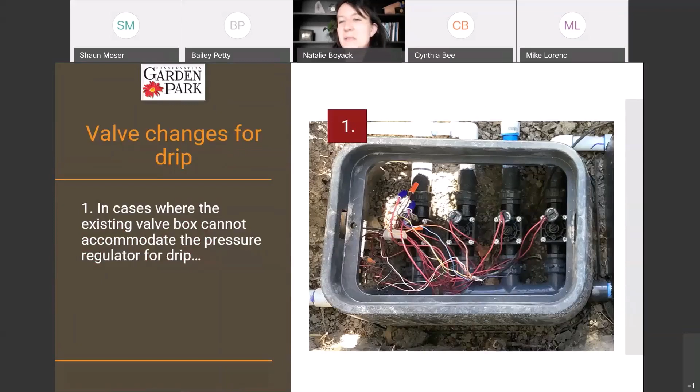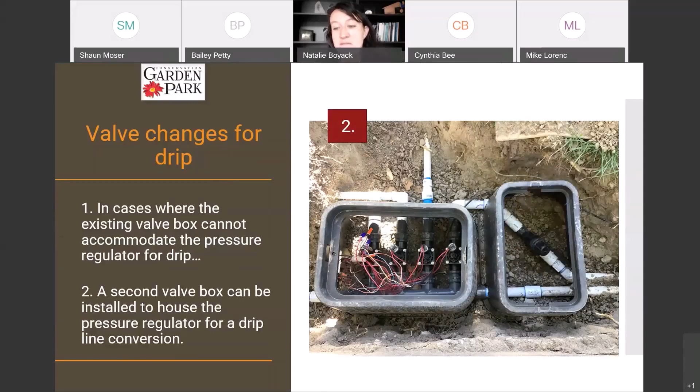So if you are wanting to put the pressure reducer and filter at the valve, but there's not room in your valve box, then you can get a little bit creative and add another box either by the valve or closer to where the drip is going to come out of the line, and add the pressure reducer and filter there. I would highly, highly, highly recommend putting it in a box though, and not just burying it in the ground, so that you can get to that filter to clean it out if needed.

All right, so if you are going to use a retrofit kit, they're pretty easy to use. Depending on how big your zone is and how many of those you would need, it may be cheaper to do the one at the valve. It would be something to at least look at pricing wise.

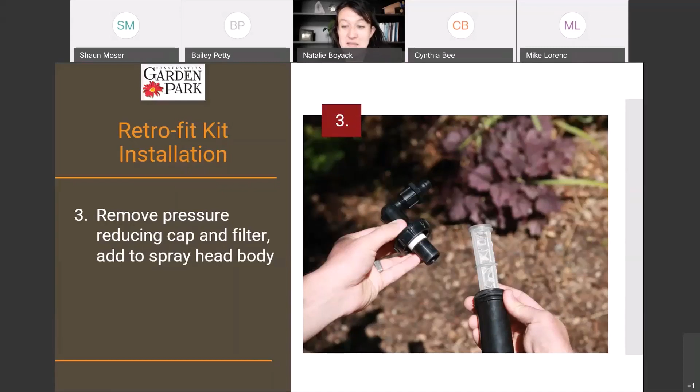And then with the retrofit kit, it comes as a sprinkler head looking thing. And so you remove the pressure reducing cap and the filter, and add those to the spray head body that is in the ground still. And then you screw it on, and once that is all assembled, you can connect the drip line to that pressure regulated filtering head.

And then you use pins or staples to help hold the drip line in place, and keep it where it needs to be. It also helps keep it under the mulch, so that you don't see it, and it helps reduce the weeds, because it's watering just the soil and where the plants can actually access the water and where they need it.

All right, so you need to cap all of the other spray heads in the same zone as the drip, because they cannot run at the same time. Otherwise, you're going to really underwater part of it or really overwater other parts of that zone. So one option is to cap all of the other spray heads with these types of caps, or if the type of spray head that you have doesn't have caps that go with them, you can unscrew the entire head and remove it and cap the pipe that is underneath.

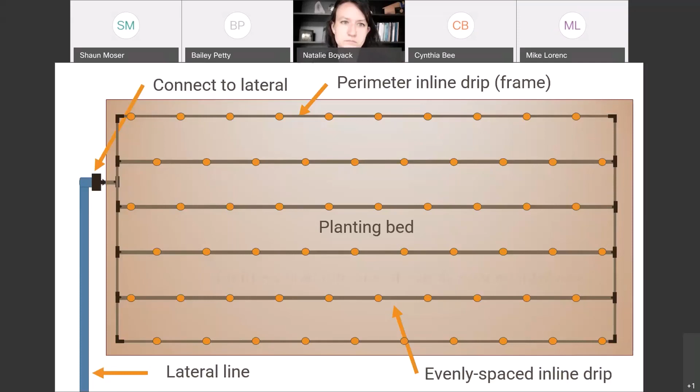And you can connect it first and then run your drip, or if you're low on time or budget, you can lay out your drip first and leave your spray heads running, and then once it's all laid out and ready to go, then you can connect it into either your retrofit head or directly into a pipe. And with this, again, the emitters are built into the line at evenly spaced intervals, and you need to buy the spacing based on your soil type.

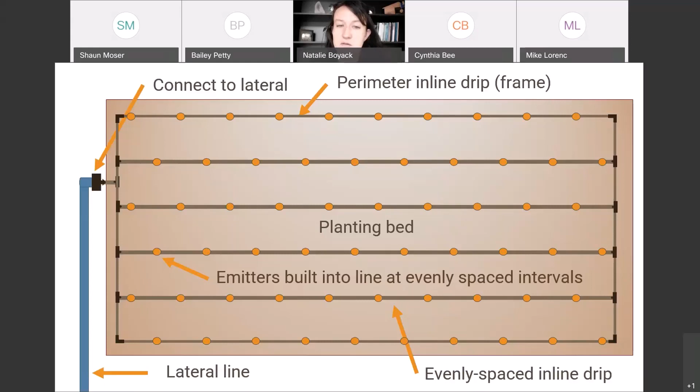And since they're laid out in this grid pattern, it is designed to create an even distribution of watering. And it soaks in underground and spreads out a lot more. Especially if you have the clay soil, that's why the emitters are farther apart. Whereas the sandy soil, since it doesn't spread out as much, the emitters are closer together. And if you offset the emitters on each row, it creates a more even distribution. But it's not something that we generally worry about here at the garden. It just kind of tends to work itself out that way.

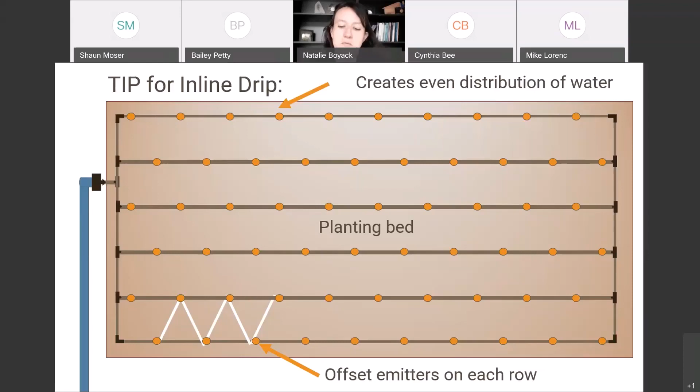So, but it does seem like it would be more efficient that way. But generally the area will be getting evenly watered anyway, and the roots of plants spread out quite a bit, and so they'll still get the water that they need. And this shows kind of how the water moves from each emitter to cover the entire area.

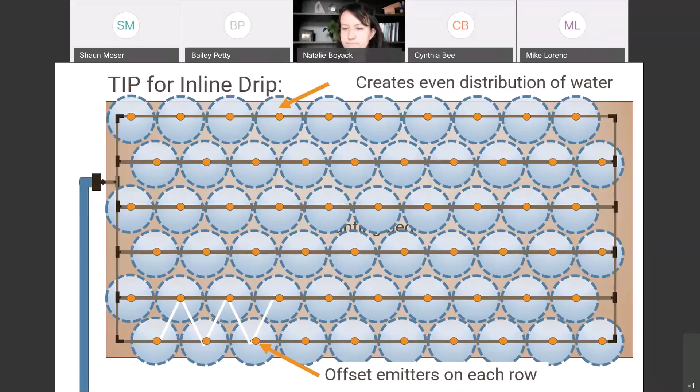So the grid does not need to be at right angles. What I just showed you in those animations is the ideal, but we do not live in an ideal world. And a lot of times our planting beds are not perfectly rectangular, and there are plants already in them, because this is a switching to drip class. Likely you already have planting beds that are on spray that you're looking to retrofit, and so they come in all sorts of different shapes and sizes, and the drip is very adaptable to that situation. Try to keep your lines as evenly spaced as you can, but they can bend and follow the curves of whatever planting bed you have.

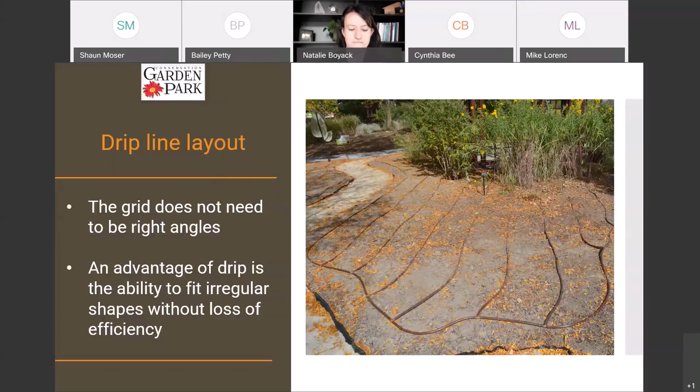So after you have the drip lines in place, then you want to cover those drip lines with 2 to 4 inches of mulch. It helps hide the lines. It also improves the efficiency because it helps hold the moisture in the soil, and it also helps reduce your weeds and maintenance, because the weed seeds that blow in will be on top of the mulch layer, where the water will be underneath that mulch. And so they're not going to get as much water as they might need to germinate.

You will still get some weeds. No matter what you do, you will still have weeds, but this will greatly help reduce those weeds, especially if you can weed the first couple of years and keep things from going to seed, so that the weed seeds that are down by the drip will germinate then, and you'll have to pull those. But other than that, after that, it should greatly reduce the amount of weeds you have.

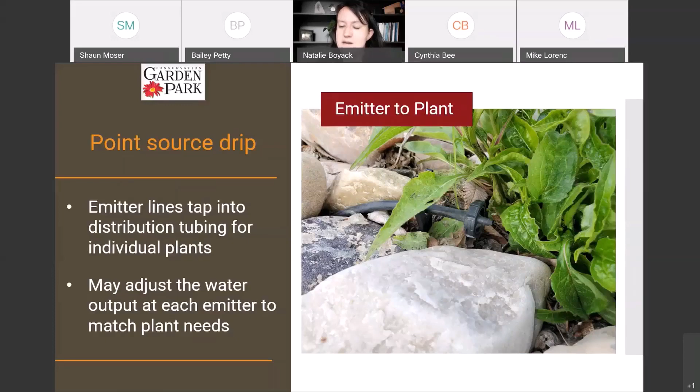With point source, the emitters plug into distribution tubing and can go directly to individual plants. And as the plants grow, you can either change out the emitters or add more emitters to match the plant needs and give them the water that they need.

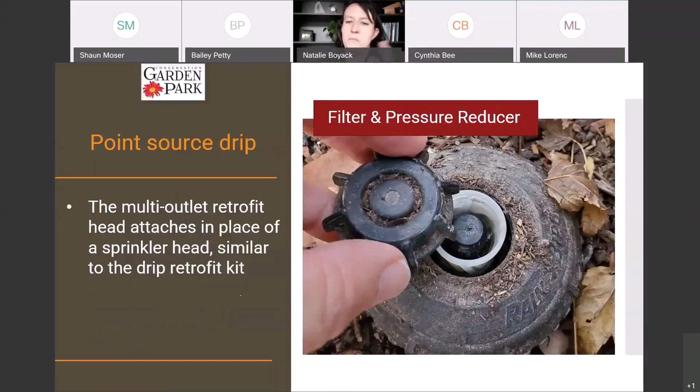If you are going to bury this underground, I would recommend putting it in a small valve box so that you can access it and make repairs and make sure that the tubes are still attached, and get to the filter to clean it out. But generally, in the garden at least, we have them kind of on the soil surface like you can see in this picture, just barely above the mulch, so that they're still accessible, but they're not in a box. So either way works, but just remember, if you're going to bury it, put it in a box so you can access it.

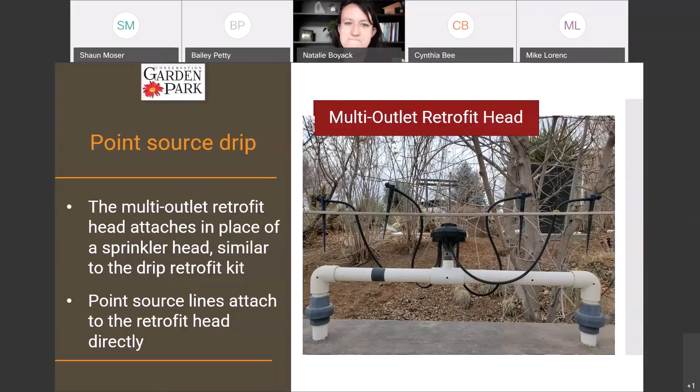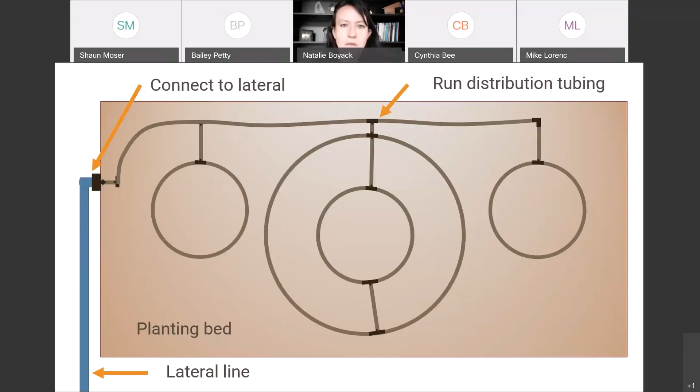So with point source drip, if you are using distribution tubing with the emitters punched into that, you would have your planting bed and your lateral line, and then you would make a connection to the distribution tubing and run that to where you want it. And then you would add your emitters every 18 inches for clay soil or 12 inches for sandy soil. And then with trees and shrubs, you probably don't want emitters less than 2 gallons per hour.

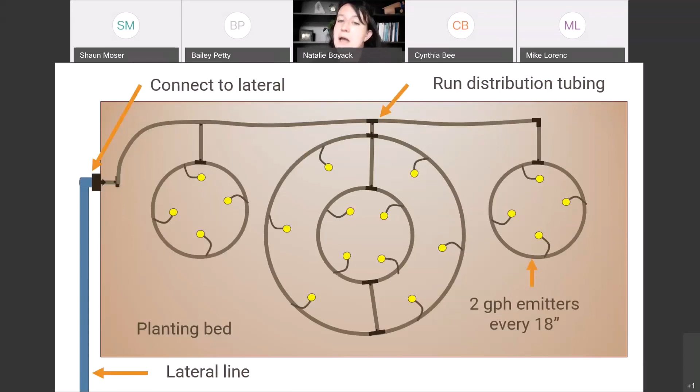So here's our trees and shrubs. But then as they get bigger, you need to increase how much water those trees are getting. And so you can increase the gallons per hour for each emitter, and then as the tree gets even bigger, you might need to add more emitters as well.

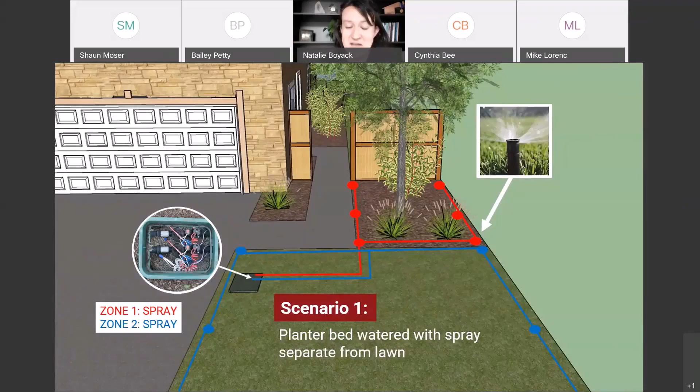So if you have an area that is planting bed, and it is watered separately from the lawn, so it comes on at a different time than the lawn, but it's all just planting bed, then since they need to run for different amounts of time, this is the best scenario, because then you can just add a retrofit head and cap all of the other spray heads in that zone. And the spray in your lawn is still going to water, and then the planting bed will be on the drip.

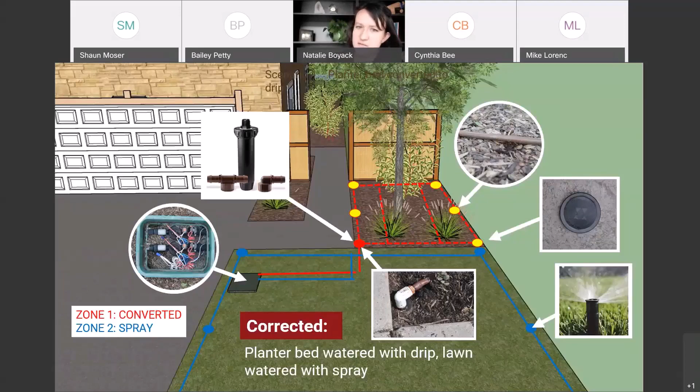If your planter bed and lawn are on the same zone, it will take a little more work, but you can add another valve with a pressure reducer and filter, and then you can run your pipe out to your planting bed and add your drip line from there, and then just cap the spray heads that were in that planting bed, and you would switch this blue circle to spraying a quarter instead of a half, because it wouldn't need to water the planting bed anymore.

Another way that you could do this, if you didn't want to add a new zone, is that you could take out the grass and make that all planting bed as well, and just switch the whole thing to drip. But the key thing is that you need to keep drip separate from spray heads. And there are ways to do that, as we just talked about.